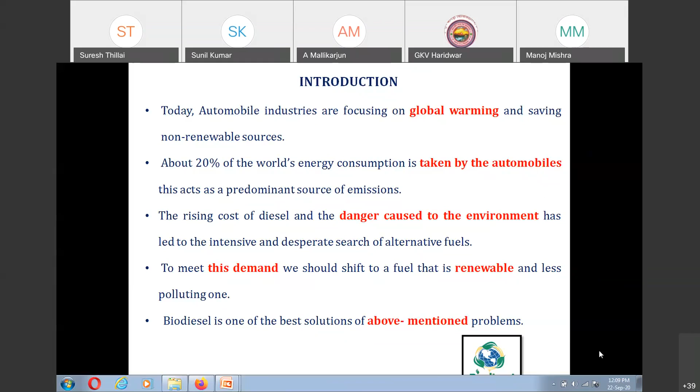Biodiesel could be produced from edible and non-edible sources. That depends upon the selection of source materials and also the availability of equipment, among other things.

But the plant is selected on the basis of FFA, which is nothing but free fatty acid. If free fatty acid is more, the yield of biodiesel produced is less, and it also contains more viscosity. So the use of edible oil for the production of biodiesel can lead to food usage conflicts.

Therefore, it is essential to search for non-conventional feedstock to reduce the cost of biodiesel. That's the main point focusing on why we are going for non-edible oil compared to edible oil. Edible oil has high free fatty acid content and can also be used for food purposes, so we go for non-conventional feedstock to reduce the cost of biodiesel.

The huge consumption of fuel oil is outmatching the supply, so alternative fuels may be needed that match the properties of petroleum based fuels.

The next topic is the technical viability of Argemone Mexicana biodiesel in variable compression ratio engines. What I did in my research, based on the variable compression ratio, most researchers and scholars are doing work for constant compression ratio using different edible and non-edible oils. But what I did in my research, mainly I took variable compression ratio. So based on the variable compression ratio, what results we got, I will discuss later.

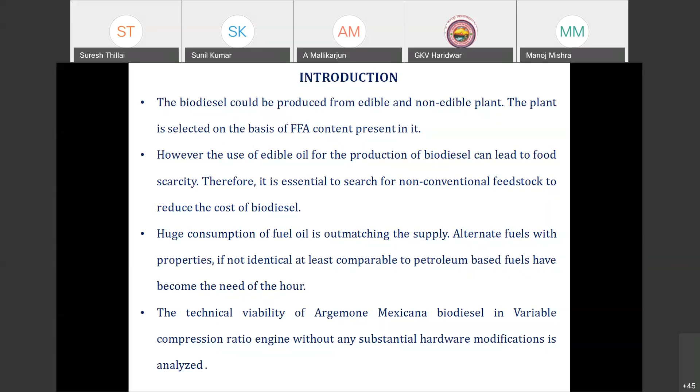Types of alternative fuels which can be used for other vehicles like medium, heavy, and small duty vehicles.

So in India, what is the reason to encourage alternative fuels? If we talk about India, it is world third in oil consumption, and also imports 70% of total oil demand. Not only that, of total oil demand, 90% of total consumption is utilized by the transport sector. So this is the reason we are encouraging alternative fuels, especially for India.

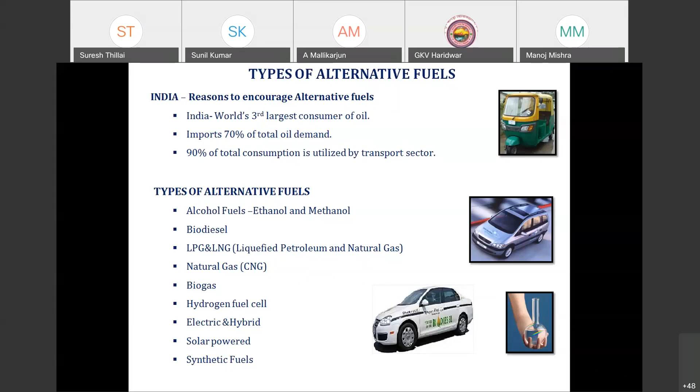All the different types of alternative fuels which can be used for internal combustion engines, both petrol and diesel engine, like overall fuels if you take ethanol and methanol, biodiesel, LPG, LNG - liquefied petroleum gas and liquefied natural gas, then CNG natural gas, biogas, hydrogen fuel cell, electric and hybrid vehicle, solar power vehicle, and synthetic fuels. So these are all the different types of alternative fuels which can be used for internal combustion engines.

This is not part of my research, but if anybody is doing a biodiesel research project in UG, PG or PhD, the research motivation of biodiesel is E3 - energy, employment and environment. Biodiesel production gives energy, and also affects environment and employment. So this is the main research motivation.

Also understand that diesel or liquid fuels run on internal combustion engine through suction, compression, power, and exhaust stroke. During the exhaust stroke, all the unwanted gas goes to the ventilation, and those gases create more pollution to the environment. Because of this pollution, there are health effects, ozone layer effect, and global warming. So to avoid this problem, definitely we need to switch over to biodiesel. This is the main thought or research motivation for why we are going to use biodiesel.

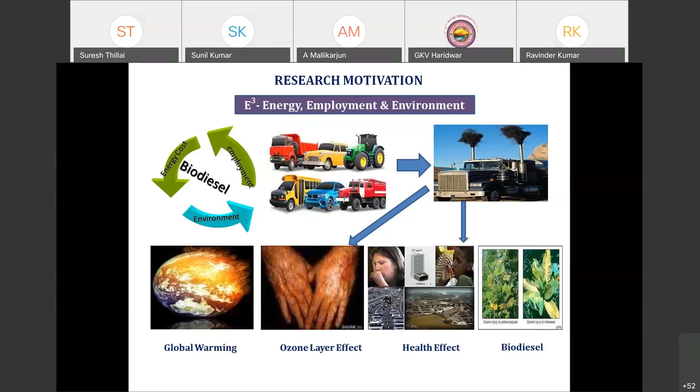Through this Atal program, everybody shared about biodiesel definition and its advantages and disadvantages. I also shared some different definitions of biodiesel, and what are the advantages of using biodiesel production.

What do you mean by biodiesel? Biodiesel is the name of a clean burning alternative fuel produced from domestic renewable sources, and biodiesel contains no petroleum, but it can be blended with diesel to create a blend. That means we can use B100 pure biodiesel or 10%, 20%, 30% blending levels. But mainly for biodiesel, up to B20 is sufficient in engine conditions. If you use a constant compression ratio engine or variable compression ratio engine, up to B20% is sufficient, because it produces more advantage compared to other blending levels.

Why do we use B20? If you take B20, lower level blends can be used in current engines without any engine modification. Engine modification refers to the intake system and exhaust system. In the exhaust system, many components are included, like exhaust manifold, catalytic converter, silencer also called muffler or resonator. After the silencer, a small tailpipe is provided, which reduces the level of sound noise coming from the silencer. This is the main part considered as the exhaust system.

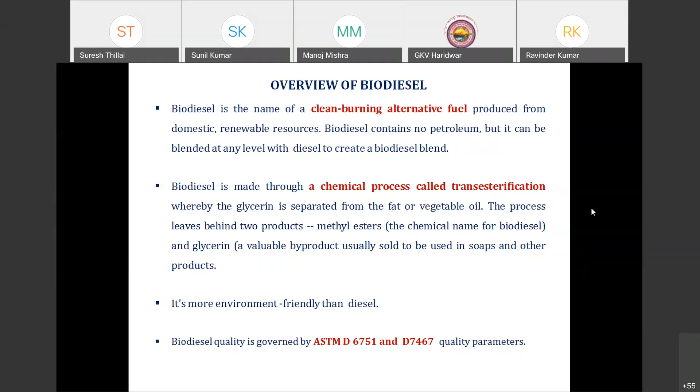Now let's look at the advantages and disadvantages. This is essential for biodiesel whether we use variable compression ratio or constant compression ratio engines. Based on these advantages, we have to predict our results including engine performance, combustion characteristics, and emission characteristics.

First, there's a reduction in toxic engine emissions because biodiesel contains more oxygen. Second, biodiesel contains no sulfur dioxide emission, which means reduction in acid rain problems, and also greater lubricity.

This greater lubricity is a most important advantage of biodiesel, leading to improved engine performance and engine life. Then there's the higher flash point of biodiesel, which gives improved safety of operation compared to other fuels like diesel, petrol, or CNG.

Biodiesel is non-toxic and biodegradable, a renewable fuel, and it reduces exhaust emissions compared to diesel fuel, such as unburned hydrocarbon, carbon monoxide, soot, particulate matter, and sulfur dioxide. These emissions can be controlled using biodiesel, especially with variable compression ratio compared to constant compression ratio, though NOx emission has slightly increased.

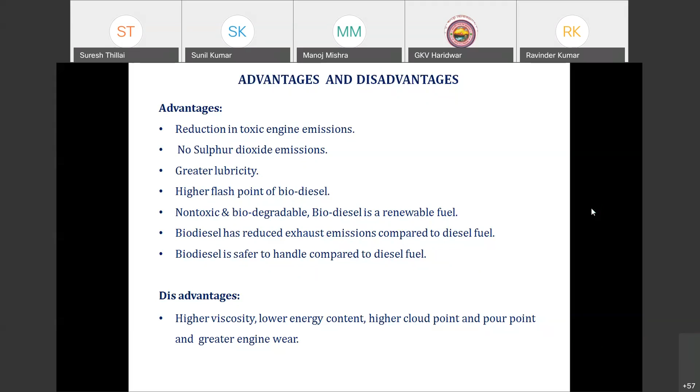Other disadvantages include higher cloud point, pour point, and greater engine wear. These are all the disadvantages of biodiesel. And this covers the general properties of biodiesel.

So like cetane number, already we discussed about advantages and disadvantages, followed by properties of biodiesel and diesel - cetane number, what is the range, and lubricity.

When compared to diesel, biodiesel has greater lubricity and biodegradability - it readily biodegrades when compared to diesel. Also, biodiesel contains more oxygen when compared to diesel. If there's more oxygen during performance or emission, definitely it would give more advantages for performance characteristics, emission characteristics, even combustion characteristics.

Some other differences you can see: sulfur. In biodiesel there is no sulfur content, so no sulfur dioxide emission is produced for biodiesel. Then flashpoint, renewable supply, and production process.

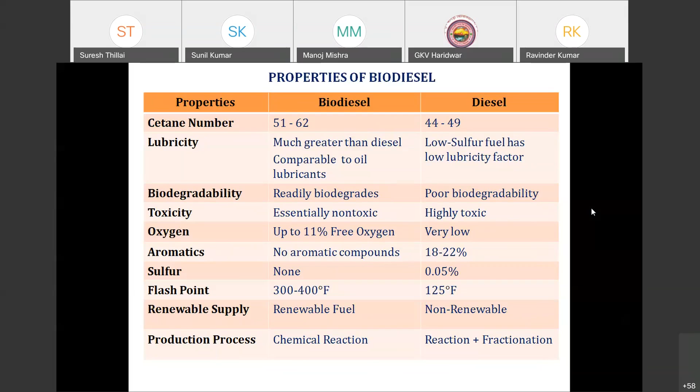For biodiesel production, we can use chemical reaction method, diesel reaction, and fractionation method. In chemical reaction method, there are different methods which can be used for biodiesel production, but mainly we are going to use transesterification process. That is called chemical reaction, and that will also tell the production process.

After this, based on my research, I have gone through some literature papers. Based on the literature, the main sources are Elsevier, Taylor and Francis, and Springer. So I have collected some papers, and based on those papers, I looked at what they did.

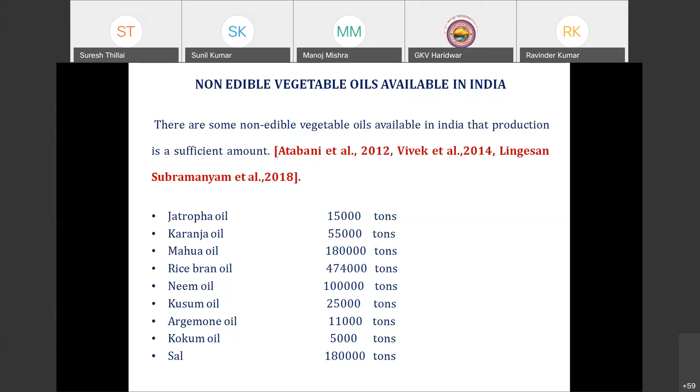So literature collected from journals include authors and title. What is the specification? For example, one title: performance, emission, and combustion characteristics of variable compression ratio using waste cooking oil in diesel blend, published in Elsevier by one author.

He used a variable multi-fuel compression ratio engine, with maximum power, speed and all those parameters considered. Blending ratios taken were B20, 40, 60, 80 with load 50%, using waste cooking oil. Some inferences from his research paper show that when compared to other blends, there may be an optimum blend or optimum compression ratio that gives the best results.

It has been identified that for constant compression ratio, only one compression ratio is taken and readings are recorded, based on which performance improvement, emission reduction, or combustion characteristics based on cylinder pressure and crank angle are found. But when using variable compression ratio, we have to achieve the optimum compression ratio level, which should give more exact results and also reduce emission.

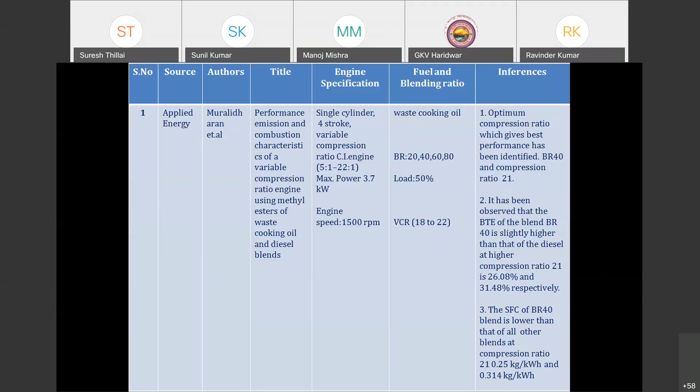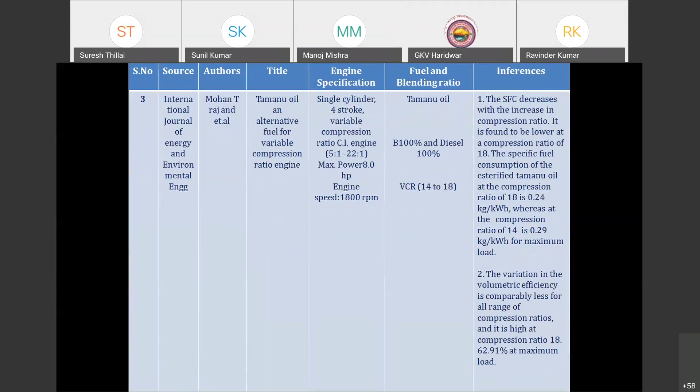This is also from some inferences I took from journals, by Raj, who used Tamanu oil with a certain blending ratio and variable compression ratio from 14 to 18. Similarly, Amar Pandhare did work for Jatropha oil, with these blending ratios.

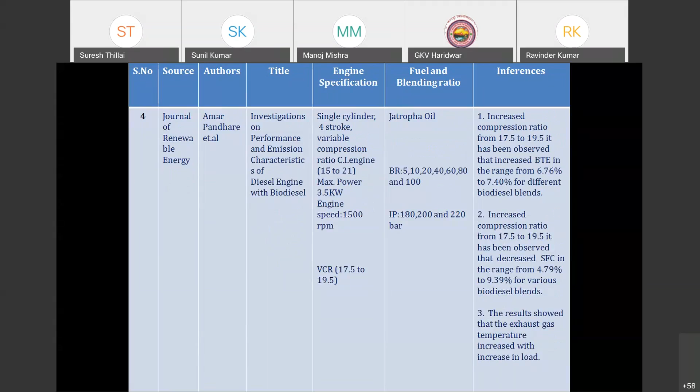So if we go through that literature survey, here are the inferences from it. These inferences I got based on the research work completed, previous work done using variable compression ratio and different oils.

From the above research studies, it is clear that biodiesel is one of the major alternative fuels, both edible and non-edible, usable in both constant and variable compression ratio. It has also been identified that lower level blends produce less emission and improve engine performance, but thermal efficiency of biodiesel fueled engines is slightly lesser than diesel fuel. However, some non-edible oils give increased brake thermal efficiency because of the properties of the fuel used.

Few researchers have proved the need for switching over to variable compression ratio when compared to constant compression ratio. It provides better fuel efficiency, up to 30% reduction in fuel consumption, and also better control of peak cylinder pressure compared to constant compression ratio.

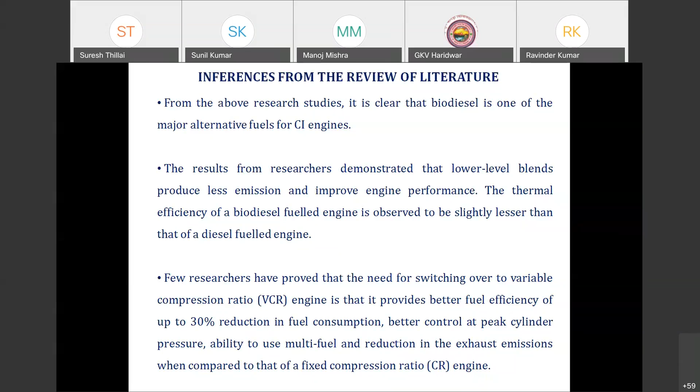Moreover, when using a multi-fuel engine, the exhaust emission compared to fixed or constant compression ratio is the reason we use variable compression ratio, specifically in CI engines. All of you know why it's called a CI engine, and petrol engine is called SI. In diesel engines it's called constant pressure cycle, and petrol engine is called constant volume cycle.

Some inferences from the prior work done clearly demonstrate that lower emissions were obtained by usage of biodiesel over diesel. Lower percentage of biodiesel with respect to diesel definitely reduces emission compared to NOx. NOx has slightly increased because of increased peak temperature, which increases NOx emission for both biodiesel and diesel.

It was clearly shown that the VCR engine offers the potential to increase combustion efficiency, increase efficiency, reduce ignition delay, and give good engine performance, and improved fuel economy when using variable compression ratio compared to constant compression ratio.

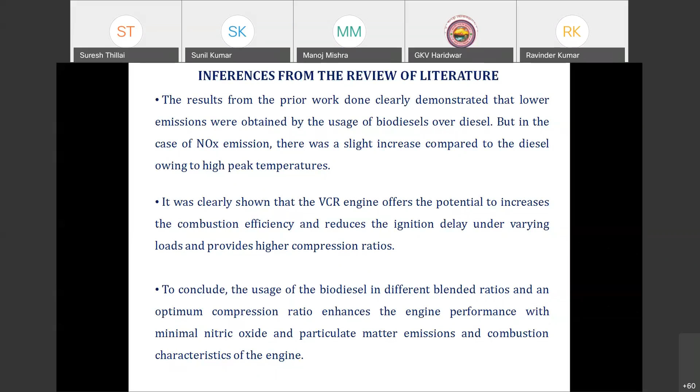To conclude, the usage of biodiesel in different blended ratios and optimum compression ratio: when using constant and variable compression ratio, we finally have to identify the optimum compression ratio that gives the best engine performance with minimal nitric oxide. It may produce less nitric oxide depending on the type of biodiesel available, along with particulate matter emission and combustion characteristics of the engine.

Move on to this slide. After the inferences, what is the research gap? Why have I chosen Argemone oil in terms of variable compression ratio?

From the review of literature, it is observed that biofuel blends are used extensively in direct injection engines, and prior studies demonstrated only lower level blends which produce less emission and improve engine performance. Up to B20, I already told why we are going to use B20 fuel. If we use lower level blends, it definitely reduces emission and improves engine performance, and we should not need any engine modification.

Beyond B20, definitely some engine modification has to be made based on fuel characteristics. Many research studies were conducted in different types of engines with biodiesel prepared from various oils. The effect of parameters on engine performance and emission characteristics has been highlighted in many studies, but very few studies were carried out in a VCR diesel engine. This is also one research gap.

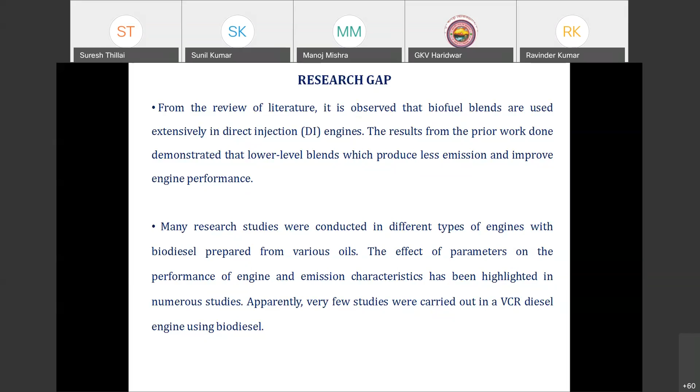So the present work is focused on the performance evaluation and emission characteristics of a VCR diesel engine using Argemone Mexicana biodiesel.

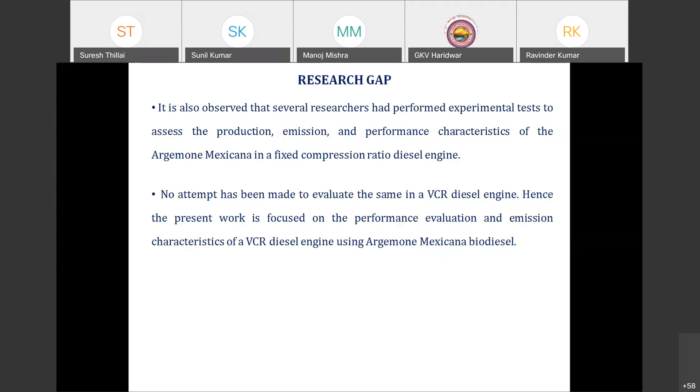Mainly, why have I selected this Argemone Mexicana oil compared to other non-edible oils? I referred to so many journals, and after that I chose Argemone biodiesel, which is available in India.

Also, according to the literature review, many researchers have investigated that free fatty acid content is most important for biodiesel production. If we go for biodiesel production, we mainly have to concentrate on free fatty acid.

In free fatty acid itself, we have to consider viscosity. If more viscosity is present, engine performance will suffer and emissions will also be higher. It was found that the free fatty acid of Argemone oil biodiesel is very low compared to other non-edible oils.

As a result, this could be utilized in reducing biodiesel production cost. When using Argemone oil compared to other non-edible oils, the biodiesel production cost is less because the free fatty acid is less, and we can use a single step, the base catalyst process, which keeps production cost low.

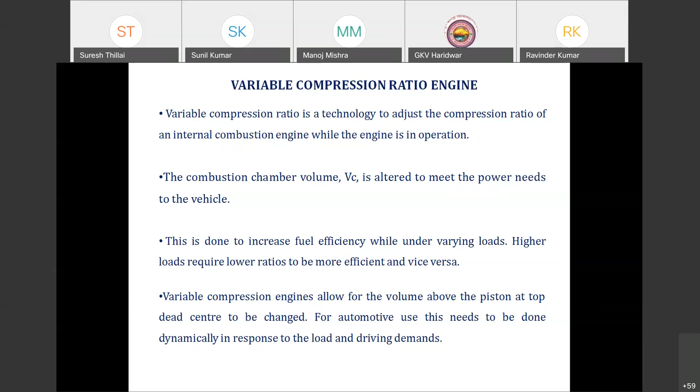In an internal combustion engine itself, while the engine is in operation, we can alter it using different methods. This needs to be done dynamically in response to the loads and driving demands, as I explained in the previous slide.

You can see these images, like TDC to BDC, the piston movement. Based on the piston movement, we define constant compression ratio as maximum cylinder volume and minimum cylinder volume. Compared to those things, variable compression ratio is becoming increasingly desirable as oil prices increase.

Car buyers or vehicle buyers have an increased interest in fuel economy. Because of that, if we reduce fuel consumption, that would be a main advantage for buyers of vehicles like medium duty, heavy duty, or light duty.

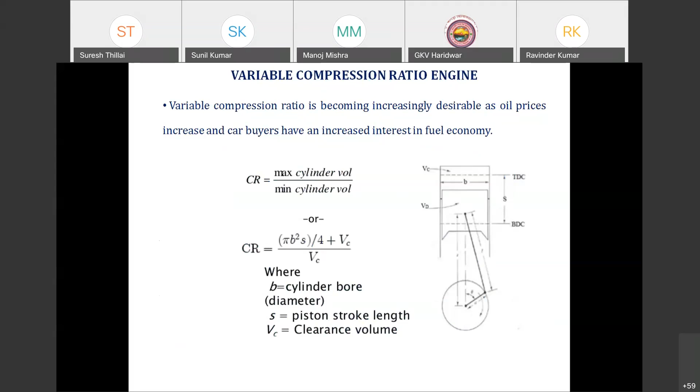So what are the disadvantages and what are the advantages? Compared to constant compression ratio, these are the advantages of variable compression ratio. The need for switching over to the VCR engine may produce better fuel efficiency, a 30% reduction in fuel consumption, and better control of peak cylinder pressure during the combustion process in a multi-fuel engine.

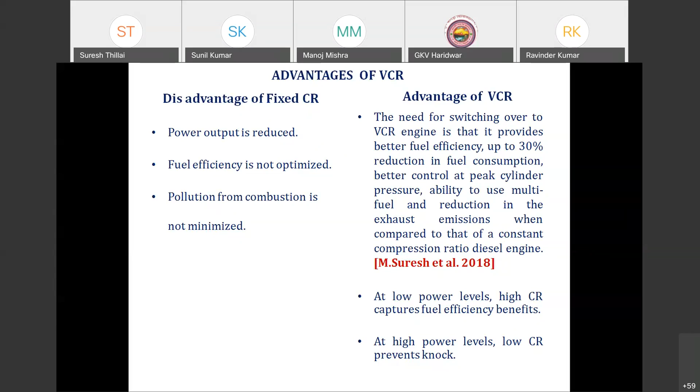This is a paper I have published in Renewable and Sustainable Energy Reviews, which has an impact factor of 12.3 something. Based on that, we can see some disadvantages of constant compression ratio: pollution will be more, fuel efficiency is not optimized, and power output is reduced. These are general things.

What are the ways, in general? There are different methods used to modify the constant compression ratio. Here, 6 methods are there: moving the cylinder head, variation of combustion chamber volume, variation of piston deck height, modification of connecting rod geometry, moving the crankpin within the crankshaft, and moving the crankshaft axis.

So only 6 methods can be used to modify the compression ratio in a variable compression engine while the engine is in operating condition. But in our engine, we used moving the cylinder head, because the research engine is specifically designed for a tilting cylinder block arrangement, which enables the engine to vary the compression ratio without discontinuing the engine.

Compared to other methods, moving the cylinder head without discontinuing the engine and altering the combustion chamber geometry allows us to change the compression ratio. Above the cylinder head, it has been provided with compression ratio adjustment. You can see these images - all of you know about this diagram. You can change each operation automatically using these components. So this is one method which can be used for variable compression ratio, or changing the compression ratio.

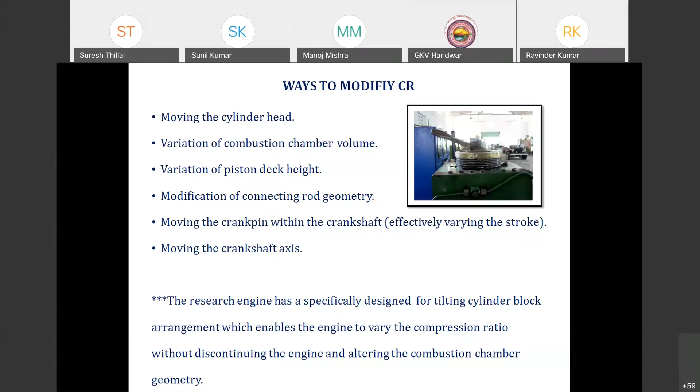Moving on to the objectives. The main objective of this present study is to analyze the effect of compression ratio, I mean the optimum compression ratio of the biodiesel, and also finding performance and emission characteristics of a single cylinder variable compression ratio multi-fuel engine. So in this multi-fuel engine, we use Argemone biodiesel.

This research's main objective was the extraction of oil from Argemone seed, which is available in the north side of India. I used this for research work in Pune, with help from the Indian Biodiesel Corporation and ARAI, the Automotive Research Association of India, Pune. So the main objective was extraction of oil from Argemone seed, then obtaining biodiesel using a suitable trans-esterification process for Argemone mexicana oil.

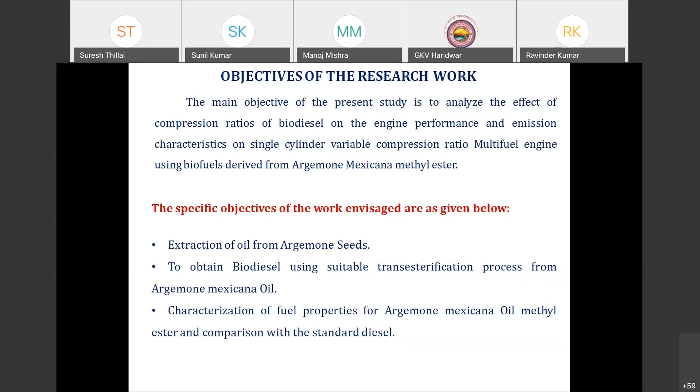After processing Argemone mexicana oil, we found the characteristics and fuel properties, compared both Argemone and some other non-edible oils with standard diesel. This was a main objective.

Also, preparation of test fuels in the form of biodiesel blends and additives: biodiesel 10% with 90% diesel, biodiesel 20% with 80% diesel. I took it up to B100, and also varied the compression ratio from 14 to 18.

The last objective was to evaluate the performance and emission characteristics of the variable compression ratio engine using fuel produced from Argemone mexicana, what we call methyl ester. If we use methanol as the alcohol in production, that's called methyl ester. Using methyl ester means Argemone methyl ester compared with diesel.

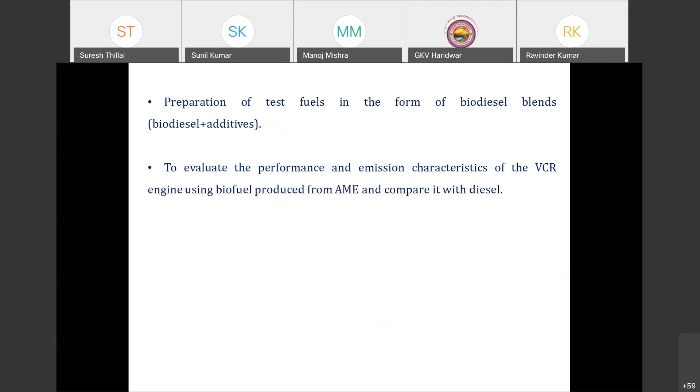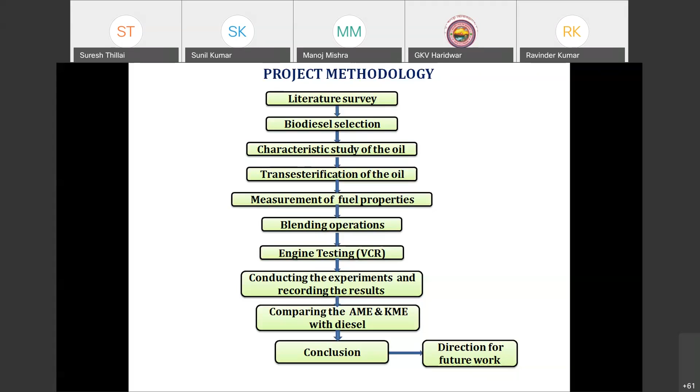Argemone mexicana, or Argemone mexicana. Also, some of the participants from Tamil Nadu may be attending this workshop, so for their understanding, I mentioned it in Tamil font.

Argemone mexicana is a herbaceous medicinal plant belonging to the family Papaveraceae, originating from Mexico, but now found all over India, even in the north. It produces more when it grows up to 1.5 meters in height.

In Pune, there are so many non-edible oil plants and oil also available through an NGO.

Argemone mexicana is also called by the botanical name Mexican poppy. The Argemone fruits can be collected from the Konkan area located in Pune, where we collected this oil and conducted our research.

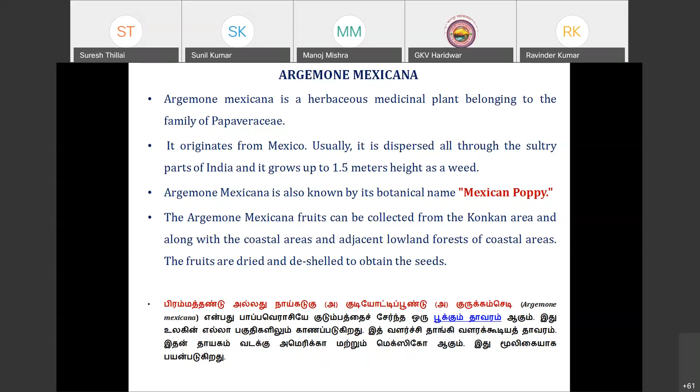One professor completed research using this biodiesel in a variable compression ratio engine, 5 to 6 years back. He used a constant compression ratio and tested it on a real engine, not just experimentally - he tested it on a Mahindra Jeep with a blend of 25% biodiesel with diesel.

Now, production of biodiesel. This is the most important thing. There are different methods of biodiesel production, but I will specifically explain why we have to go for the trans-esterification process. My research work was carried out in IBC, Indian Biodiesel Corporation Pune, as well as ARAI, Automotive Research Association of India.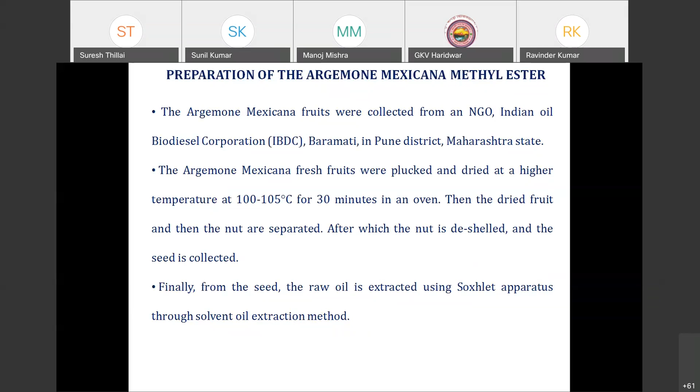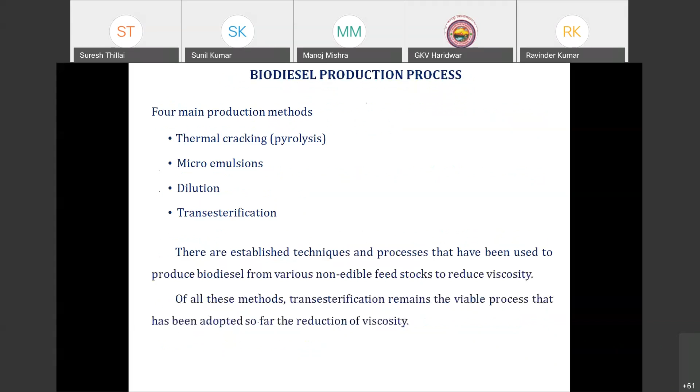Now let's talk about free fatty acid calculation. If we talk about the differences between edible or non-edible oil, we should concentrate only on free fatty acid. If we concentrate on free fatty acid, we can easily go through these methods - there are 4 methods - and then directly use the trans-esterification method.

Even within the trans-esterification method, there are 2 methods which can be used: base catalyst and acid catalyst. If we go for base catalyst, certain methods can be used; if we go for acid catalyst, other methods can be used. That depends upon the free fatty acid and upon the viscosity.

This is the general procedure I followed for this research work. After extracting the oil using the Soxhlet apparatus, we find the free fatty acid. Determining this free fatty acid value decides whether the esterification process is required or not.

I mentioned trans-esterification and esterification. If trans-esterification, it means only a single step is needed for biodiesel production. When we use esterification, we have to do it 2 times - a 2-step trans-esterification process.

And also, how to find out the free fatty acid calculation: I took 5 grams of oil, 20 ml of isopropyl alcohol, and 4 drops of NaOH in a flask to get the FFA value. This FFA value was heated at a certain temperature limit.

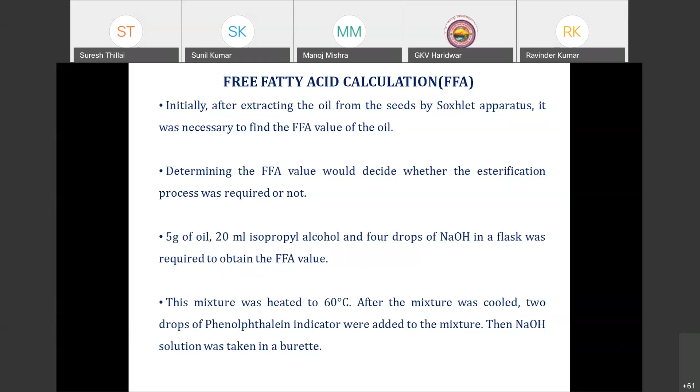After it was in cooled condition, we added 2 drops of phenolphthalein indicator in the mixture. The NaOH solution was taken in the burette. Usually we measure this FFA calculation by using burette reading, which we have to use in the chemistry laboratory. This is finally how we calculated free fatty acid, oleic acid using burette reading, NaOH normality, and weight of the sample given oil. So this is my reading.

I took it based on the burette reading, my NaOH sample normality, and weight of the sample. When compared, free fatty acid of my oil weight is 2.14. If you go above that, definitely we have to go for the esterification process. If less than 4, directly we start the trans-esterification process. This is biodiesel production. If we go above 4 FFA, we have to use the esterification process, meaning first trans-esterification and esterification, that is a 2-step process. If less than 4, directly we can go for trans-esterification.

That method is called the base catalyst method. So base catalyst means the only one method we have to follow.

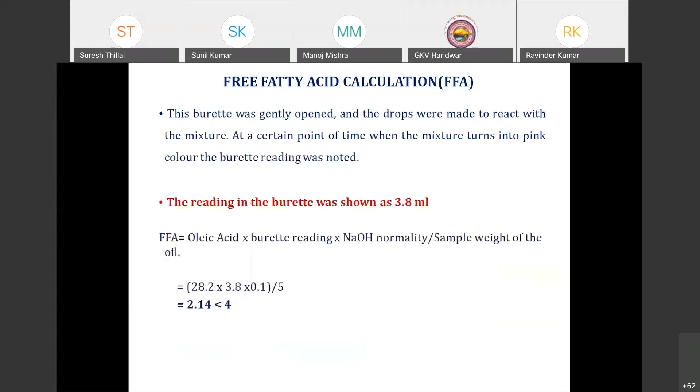This is the preparation of argemone oil. How we can use the argemone fruit - you can see these images. From the image we can easily understand how the argemone fruit is converted into argemone seed. After the argemone seed, it has been processed using the solvent extraction method, where we add some chemicals as already stated. Based on that method only, we found argemone mexicana raw oil.

So raw oil we cannot use directly in an IC engine. If we use raw oil, engine performance and emission will be getting low when compared to the diesel engine. That's why this raw oil is directly used for the trans-esterification method.

That's why we use the trans-esterification method. Compared to other methods, in trans-esterification we can get 2 products - one is biodiesel, next one is soap, meaning glycerin. So if KOH is added as the catalyst, it gives high titration oil and makes a lot of soap, compared to NaOH. For alcohol, we mainly use methanol and ethanol. We also know sulfuric acid, hydrochloric acid, organic sulfuric, ferric sulfate, and so many other things used as catalyst.

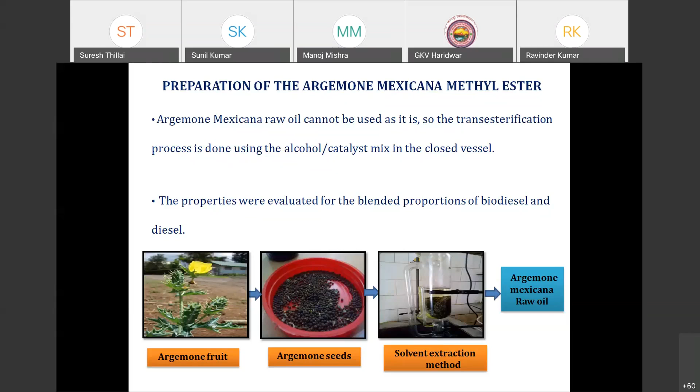So that's how biodiesel is formed. Mainly different types of biodiesel are produced from vegetable oils, animal fat, yellow grease, or edible or non-edible oil. This is the method which can be used for argemone oil using trans-esterification.

What do you mean by the trans-esterification process? It's where both edible and non-edible oil are allowed to chemically react with alcohol, either methanol or ethanol, to reduce the viscosity. By reducing the viscosity, there are different advantages we get for use in internal combustion engines.

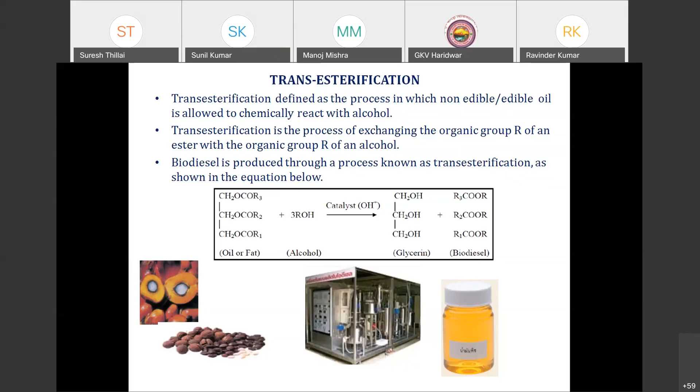It also involves exchanging the organic group - meaning the alcohol, in terms of NaOH, alcohol in terms of methanol and ethanol, and catalyst like NaOH, KOH, and many other catalysts we can use. After that, using this method, it produces one - biodiesel, and another - glycerin. This is the general method which can be used for any type of biodiesel, both edible and non-edible oils, and these are some of the chemicals used for trans-esterification of argemone and other oils.

I chose 4 different types of non-edible oils. I just want to share this slide also - this is kokum oil. As part of kokum oil, the same procedure was done.

This kokum oil was taken for a 2-step catalyst process, because compared to argemone oil, kokum oil produces more free fatty acid - more than 4. That's why it was decided to use the 2-step process, meaning acid catalyst process. But for argemone oil, I only did a single step. So compared to kokum oil, argemone oil gives a much lower production cost. We'll discuss that too.

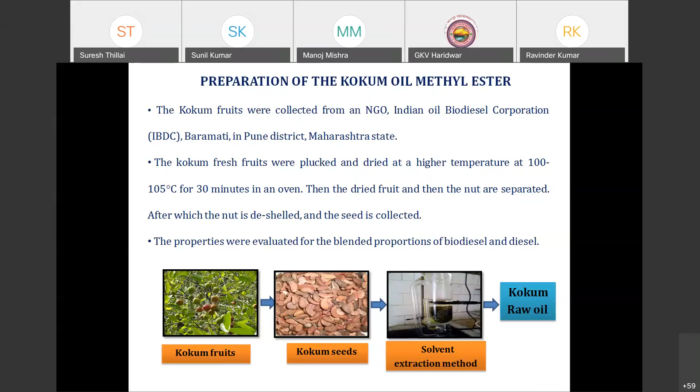This is the general biodiesel production process. First, extract oil, the raw oil. From the raw oil, the next step is to measure the FFA level, free fatty acid level.

From that measurement, we find out whether it's greater than 4 or less than 4. If less than 4, directly we go for trans-esterification process, which may produce crude biodiesel.

If more FFA, free fatty acid, is present, we should go for esterification using H2SO4 and methanol. Then after esterification, the second step is trans-esterification, and remaining steps are similar to the base catalyst process. So this is biodiesel production using trans-esterification, that means base catalyst, and esterification, acid catalyst.

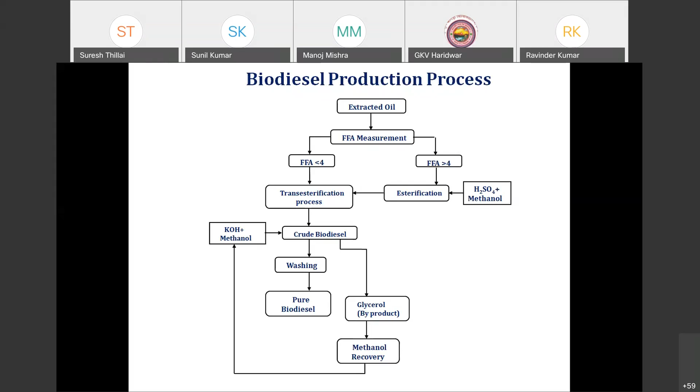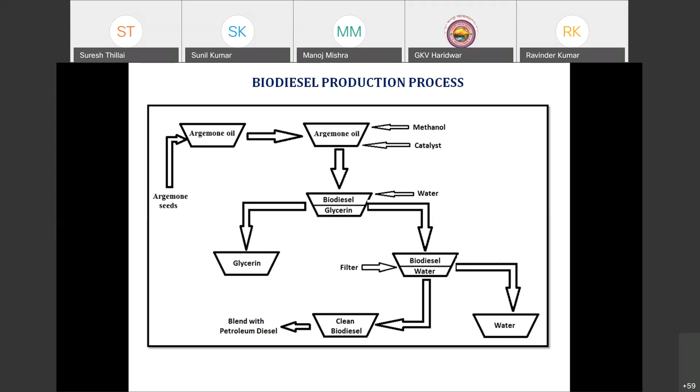This is for argemone oil, which we used in our research. We used methanol and catalyst, and found that if we add more water, it can produce separate biodiesel and glycerin. The final product of biodiesel, clean biodiesel, can be blended at any level, and separately converted into water and biodiesel and glycerin. I will discuss this further.

I already discussed the method of oil using base catalyst or trans-esterification process. For mixing of alcohol, the proper ratio is 1:3 or 1:6, depending on the oil preparation and catalyst. We use KOH or NaOH or other alcohol, then proceed to the separation process, and after that, biodiesel washing.

Why do we wash the biodiesel? If there's more viscosity, continuously washing the biodiesel will reduce the viscosity. That separation process is mainly done for trans-esterification itself. Then alcohol removal and separating glycerin, similar to soap production, and final product similar to petrol.

Next is product quality. Once we get the final biodiesel product, we check its properties to see if they match with diesel. Once the properties of diesel and biodiesel match, we can mix them at a certain blending ratio and use it in a CI engine, compression ignition engine.

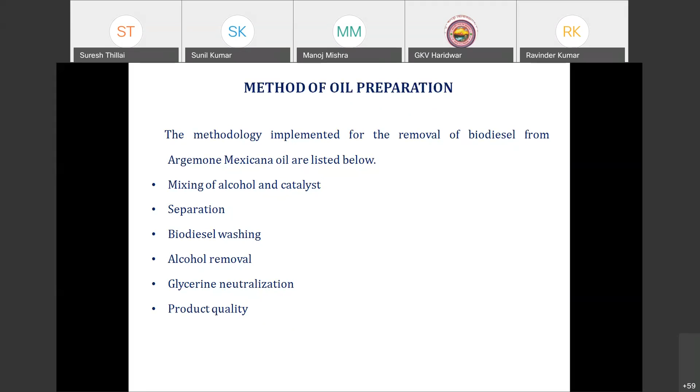This trans-esterification process was done by IBC, Indian Biodiesel Corporation - the trans-esterification process with biodiesel and glycerin separation.

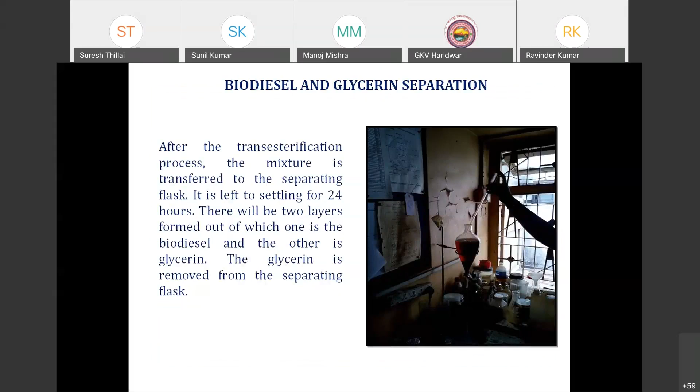We have to settle it for some hours so that two different layers form - one layer is biodiesel, another layer is like water or something. This produces the final product.

This washing process is carried out 3 times in order to reduce the pH value, which should be less than 7, since there's high sulfuric acid or more viscosity present. We have to reduce this. Once the pH value is right, pure biodiesel is obtained in the top layer and water in the bottom layer.

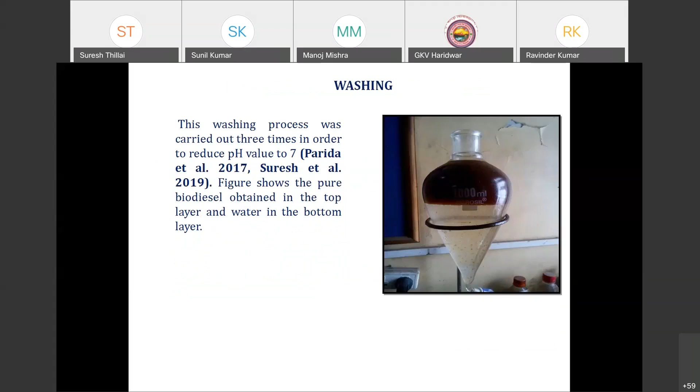The final product is 100% pure argemone biodiesel.

Next is the cost of biodiesel production. This cost analysis compares biodiesel to diesel, and I took 4 different types of non-edible oil. This gives less cost. This is an estimation and cost analysis of argemone Mexicana oil.

You can see different processes - raw material process, production cost, recovery process, and finally basic manufacturing cost. The basic manufacturing cost would be around 58.14, that is for pure biodiesel.

Pure biodiesel, 1 liter, involves some methods like separation, washing, trans-esterification, mixing of alcohol, then adding NaOH, all those things. That is why I gave this slide clearly, showing all the methods I referred to.

The main estimation gives a final manufacturing cost of 1 liter around 58 rupees, which is marginally less than diesel cost. Nowadays the present cost of diesel may vary for different states, around 75 to 80 or 70 to 75 rupees. So compared to present diesel cost, this argemone oil can be produced at 58 rupees per liter.

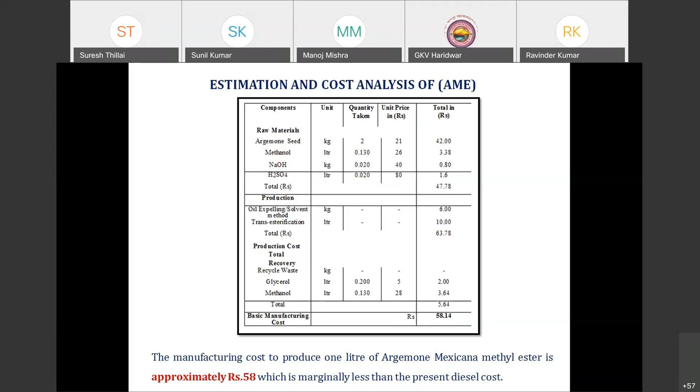What I call an internal combustion engine using some percentage level blending. These are the properties of diesel and argemone biodiesel - density, viscosity, calorific value, ash content, some important properties covered for this research work, which I carried out six years back. That time these properties were sufficient, also performance and emission was sufficient, that's why I didn't go for combustion characteristics.

Based on the properties, we can correlate with argemone 5, 10, 20, 35, 50 and 100, meaning blending ratio I took as 5%, 10%, 20%, 35%, 50%, 100%. It should match with same or similar property diesel. We have to mix that biodiesel and use it for any type of engine, either CI engine, constant compression ratio or variable compression ratio.

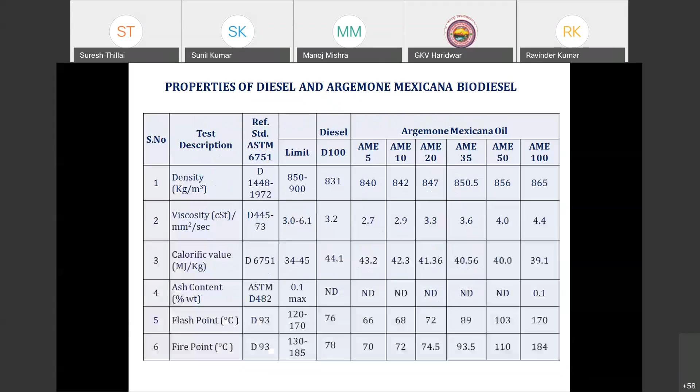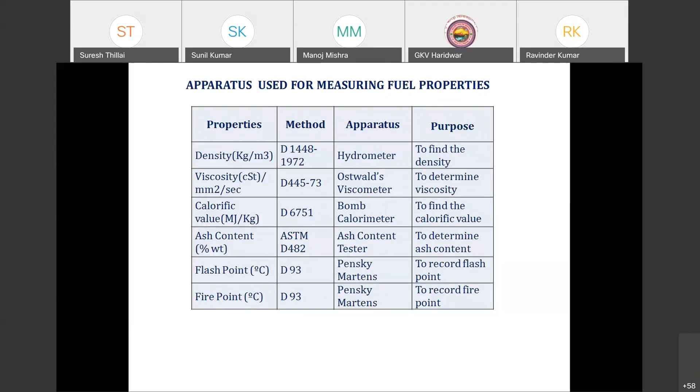This is one which can be easily understood - what are the apparatus. So if you take this, which apparatus you can use - hydrometer specification, and which method we are using. Beginning itself I told that ASTM two methods we are using. Why we are using those two? Most important, if we talk about viscosity, different methods or different apparatus can be used, but especially for this research we use these apparatus and these properties.

These are all the gauges that can be related - flash point in Pensky-Martens, then CFR engine for cetane number, viscosity, viscometer, hydrometer. Some properties based on the apparatus measured for this argemone biodiesel.

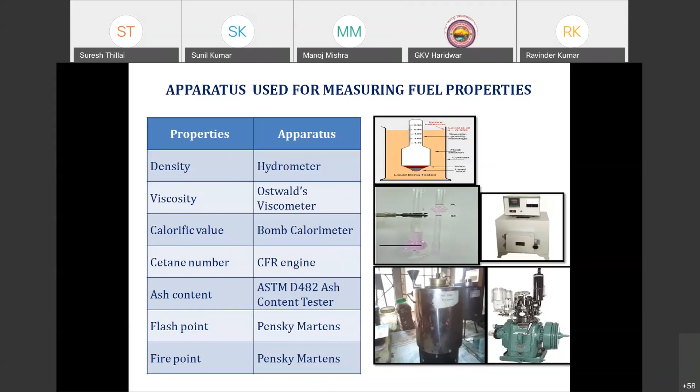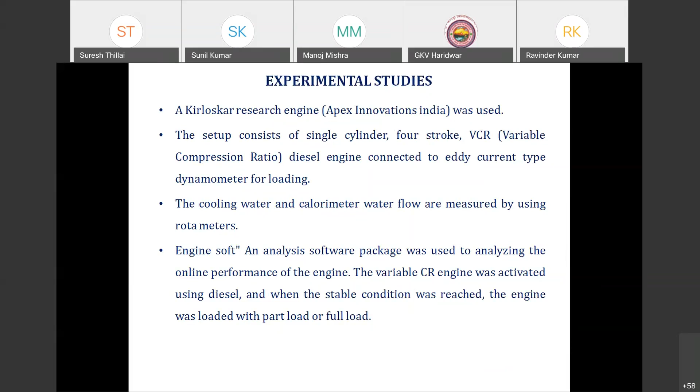This setup consists of a four-stroke single-cylinder research engine, water-cooled and multi-fuel with VCR with data acquisition. Data acquisition means computerized - everything will be monitored computerized. We have to use the oil depending on the load condition and change the compression. The engine was mounted on the bed in the test cell, and also the compression ratio can be changed without stopping the engine and without altering the combustion chamber. That's why this engine was chosen for tilting cylinder block arrangement, meaning moving the cylinder head itself, also called tilting cylinder block arrangement, used for multi-fuel engine.

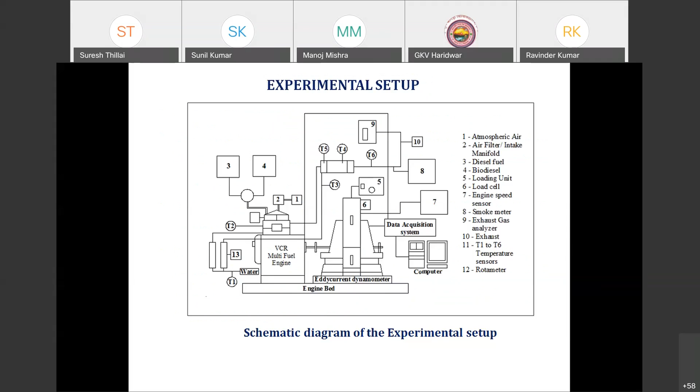Software is used to analyze the online performance of the engine. This is the experimental setup which was carried out in Pune, ARAI and IBDC - compression ratio adjustment, cylinder head, dynamometer, rotameter and fuel level indicator. We used a multi-fuel engine.

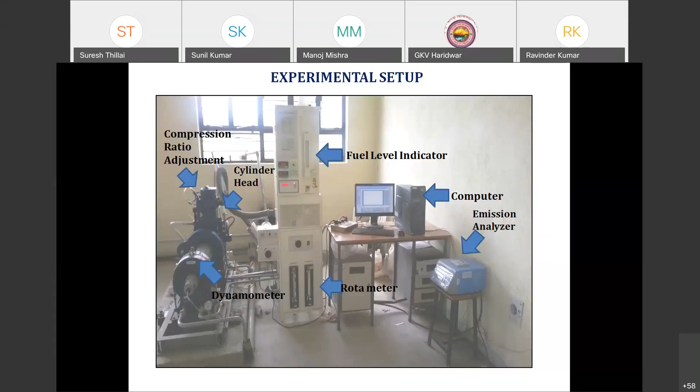Particularly for oil purpose - research engine, Kirloskar multi-fuel engine, cylinder speed, length, compression ratio here 12 to 18. Compression ratio changed from 12 to 18, but I used 4 different compression ratios and 5 different blendings. Then swept volume, power, stroke length, connecting rod length, dynamometer arm length.

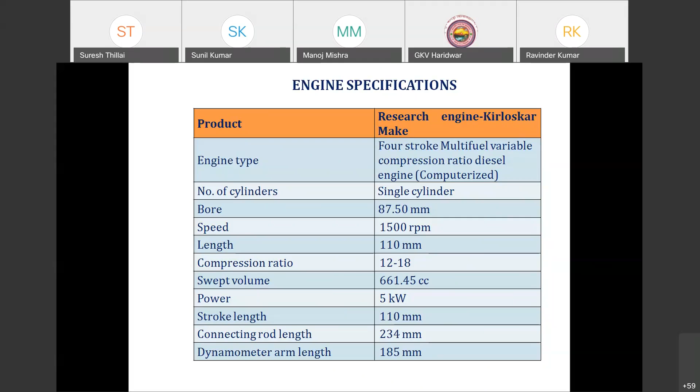Diesel blending - I mixed B5, 10, 20, 50, 100, so 6 blendings mixed with argemone oil plus diesel fuel. B5 means 5% of oil and 95% of diesel fuel, B10 means 10% argemone oil plus 90% diesel fuel, and B100 means pure biodiesel, any type of biodiesel. Here I used argemone or argemone mexicana biodiesel, and compression ratio varied from 14 to 18 - that means 6 points of evaluation. This is the experimental setup which was carried out.

The difference in results were within the limits of plus or minus 1% in all the cases, meaning uncertainty analysis was also carried out through this research work. That is also most important for those who are doing research in alternative fuels or biodiesel.

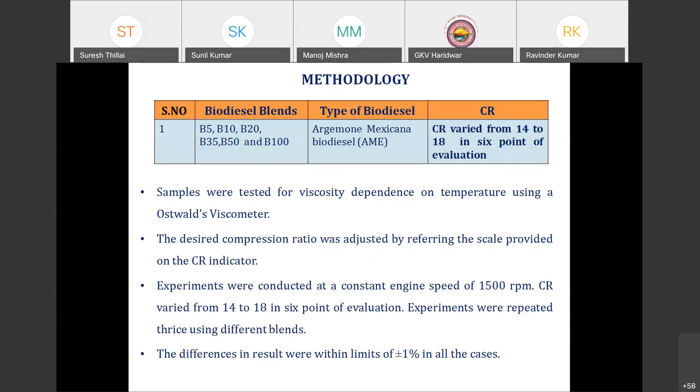So come to the results and discussion. First one, performance parameter. So can anyone tell me about different types of performance parameters which can be used for internal combustion engine? Audience?

Anyone? What are the different parameters which can be used for IC engine? Is it audible? Everyone? Yes, it is audible. Thank you, thank you.

So can anyone tell what are all the different performance parameters used for? Can anyone? Okay, air fuel ratio, brake power. Brake power, yeah, very good. Only these two things, only performance parameters?

There are different types of parameters which can be used for performance, like indicated power. So brake power, indicated power. Okay, so let us see there. The parameter knocking, that is different. Knocking is not a performance parameter.

So these are all the terms which can be used for performance parameters: mean effective pressure in terms of brake mean effective pressure, indicated mean effective pressure. Then as already mentioned, brake power, frictional power, indicated power, torque, specific fuel consumption, brake specific fuel consumption, specific energy consumption, brake specific consumption, thermal efficiency, indicated brake thermal efficiency.

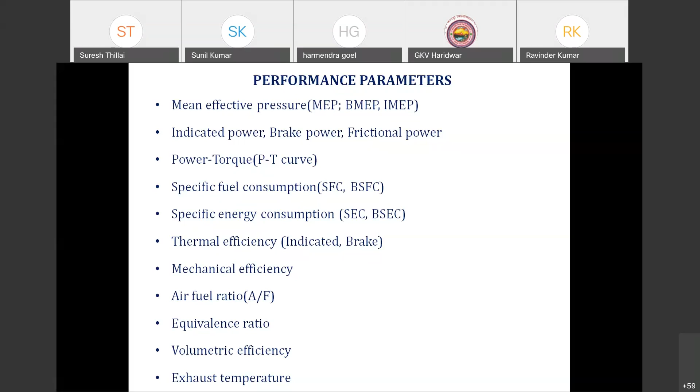So that is also what we call exhaust temperature. First thing, we choose a different load condition: low load, medium load, high load, but I have presented here high load condition. Even low load and high load also give more engine performance and reduce emission. But why I have given high load condition, when compared to the other two loads, it gives more advance and also improves the engine performance.

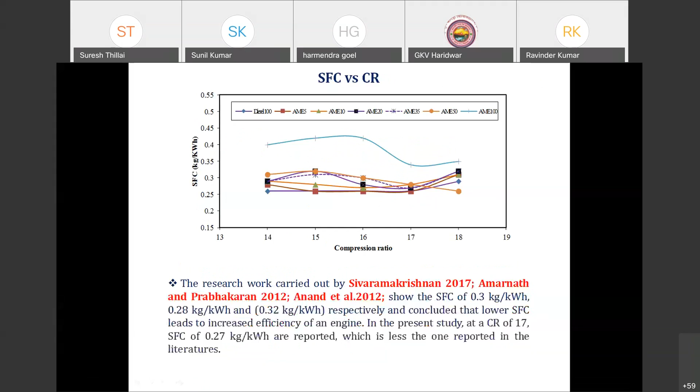The efficiency versus compression ratio. Before that, the definition of brake thermal efficiency is nothing but evaluating how the engine transforms the thermal energy of the fuel into work - essentially how efficient the engine is, and how well it can convert thermal energy into useful work.

Inside the engine there may be some heat loss, so that decreases. It has also been observed that the brake thermal efficiency of the biodiesel blend, AME 20, is higher for compression ratio 17 compared to other biodiesel blends. Also, when you increase the blend percentage, you get lower calorific value and increased specific fuel consumption.

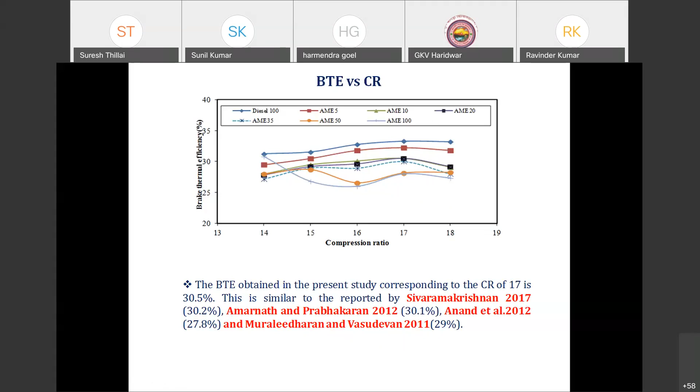This is the reason, and the same results I compared with previous research. My results were nearly 30.5 compared to other results, so it would be better compared to other non-edible oils.

What is the reason behind that? Going through some literature, it mentions the reason is properties converting chemical energy to mechanical energy, possibly due to reduced viscosity, fuel density, and high cetane number. That may explain why brake power increases at particular AME 20.

This is a case study compared to other research purposes.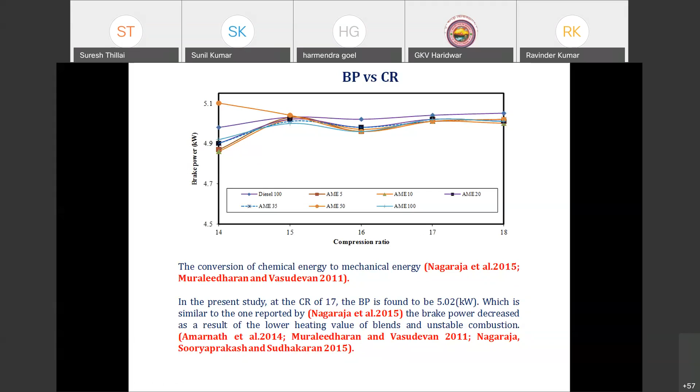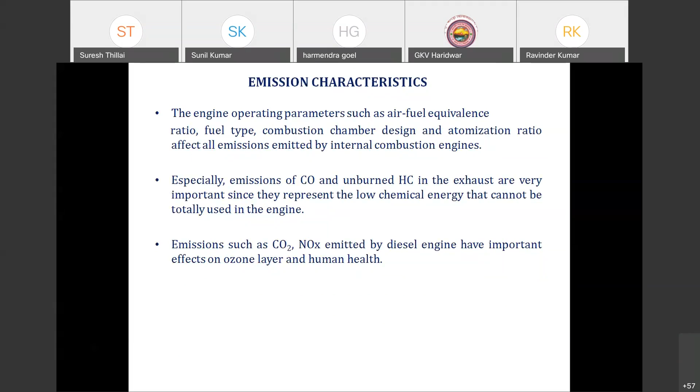Now, emission characteristics. There are different types of emission characteristics used for different types of pollutants - carbon monoxide, unburned hydrocarbon, NOx, and particulate matter or soot are produced by diesel, but I chose carbon monoxide, hydrocarbon, and NOx.

For carbon monoxide, I found that CR17 AME 20 gives better value, and it is very low compared to other values. In this research we got 0.096 at compression ratio 17, AME 20, compared to other blends - because of lack of oxygen, mixture preparation, EGR ratio, and incomplete combustion. Many things are happening.

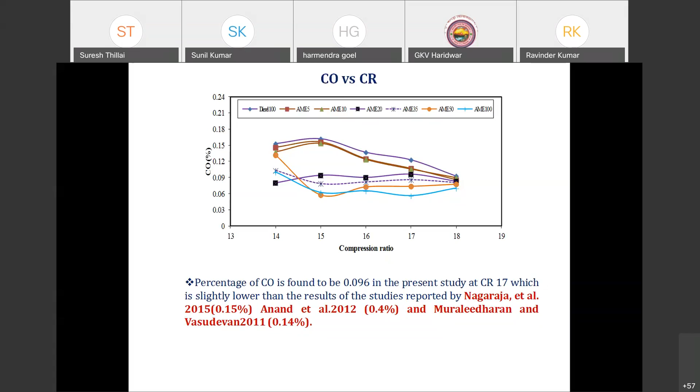This is for hydrocarbon emission, another emission product from diesel engines, also called unburned hydrocarbon - where fuel may be completely burned or unburned, which can happen with mixing of biodiesel.

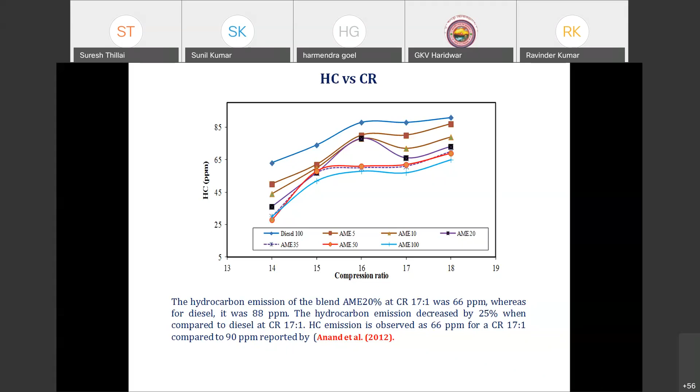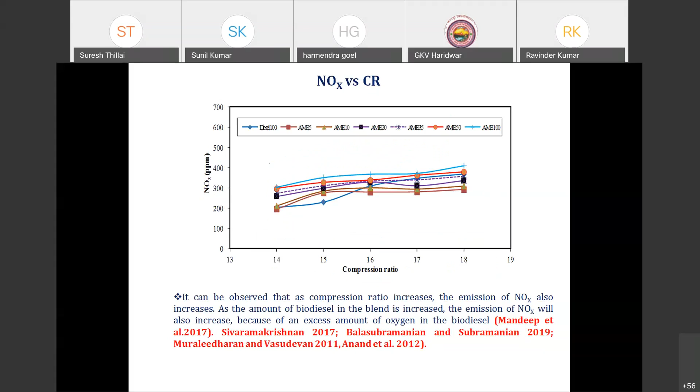Unburned hydrocarbon emission in the exhaust may decrease with increased amount of biodiesel in the blend, due to built-in oxygen - that's why I mentioned biodiesel contains more oxygen. This can lead to longer ignition and NOx emission. NOx emission can also be reduced in AME 20 compared to other blends and diesel.

This is about emission standards. Now we refer to BS6. Comparing BS6 to BS4, I went through some test procedures and found that CO, HC, and NOx are matching or related to both BS4 and BS6 norms.

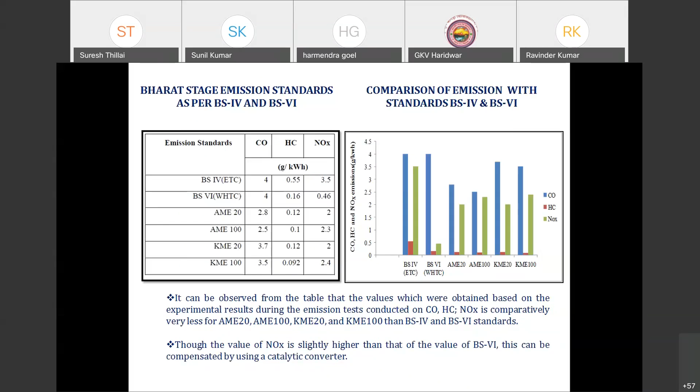So we can use this oil in internal combustion engines at some percentage level without engine modification. It is applicable for meeting emission standards 4 as well as 6. I used some formulas for converting ppm to g/kWh, as some methods are available.